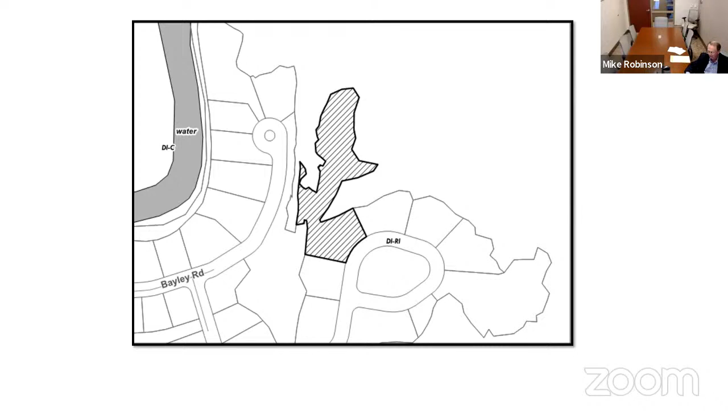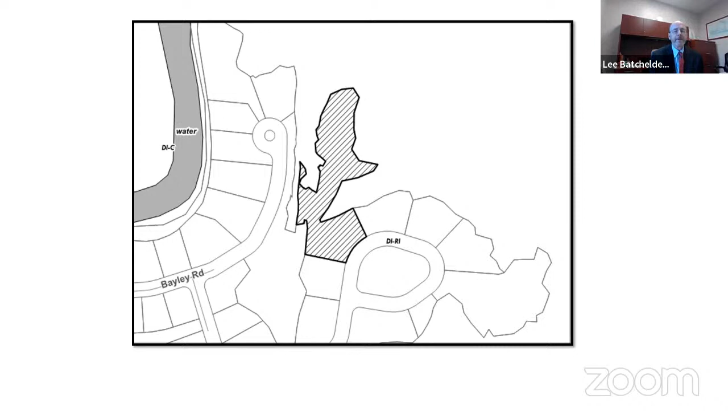Mr. Batchelder: This is a residential lot on Daniel Island, and as you can see, it has a very, very unusual shape. This request came before the board maybe a couple months ago, and is now back in front of you with some additional information. So here's the zoning map showing the location of the property, the fact that it's zoned Daniel Island Residential, which is a specific zoning district to Daniel Island.

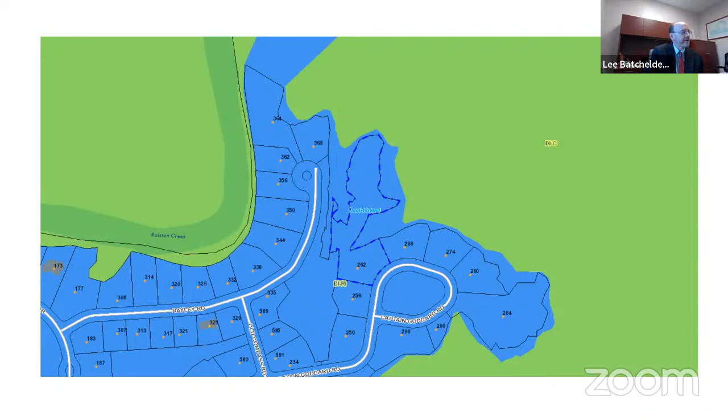Here's an aerial view looking from the north at the lot. It's on the Wando River side of Daniel Island, in a new section.

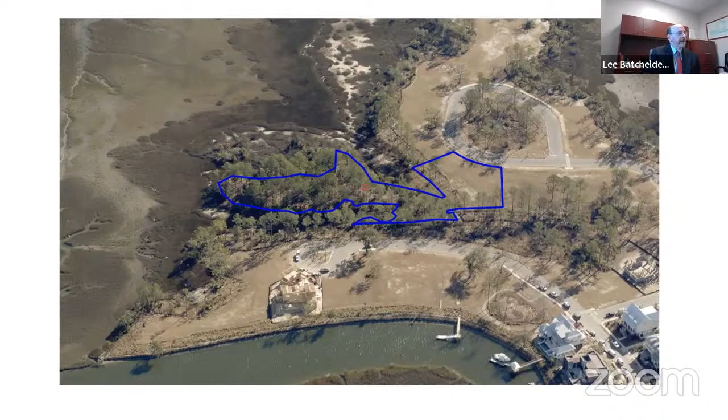The application was filed back in January and was deferred by the board in mid-February, with a request that the applicant gain approval of their proposed bridge connection, which was requiring the variance, from the Daniel Island Architectural Review Board. They have since done that, so they've requested this be placed back in front of you for consideration.

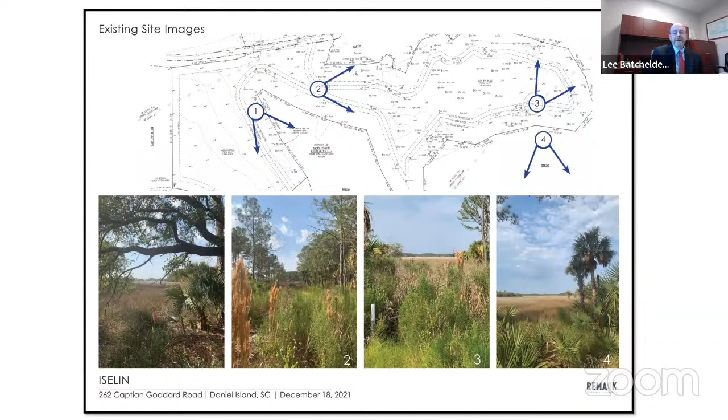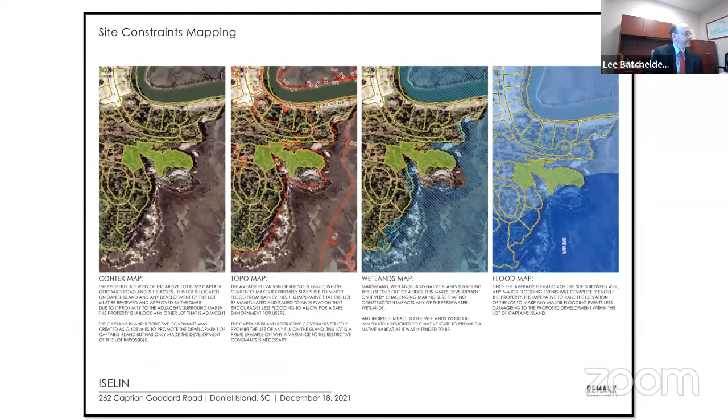Here's a survey of the lot, and there's an image later that will clearly show all the restrictions that apply to this property. I'll skip to that. These are other slides showing views of the property from different locations, and more views of the island, or of this lot.

On Daniel Island, we have a zoning requirement unique to that part of the city: a visual buffer zone. When the city annexed and zoned Daniel Island in the early 90s, we adopted a visual buffer zone requirement for lots that abut the marsh. The idea was that the tree canopies and vegetation around the perimeter of the island should be preserved as it's developed, so we don't end up with manicured lawns extending right down to the critical line, but retain that natural vegetation and natural edge to the island.

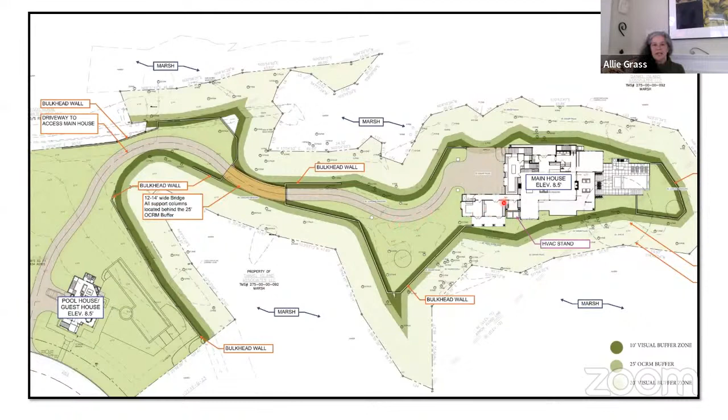I think in the application, as read into the minutes, it's to allow a bridge to encroach 5 feet. It's very specific about what they're asking. Right, and I also saw in the letter from the Daniel Island board that their approval is only for the bridge and not for the specific lot. So I'm just wondering if the board should maybe note that we're approving just the bridge, since the application was geared more toward the site not being developable due to the restrictive covenants.

I mean, maybe we don't need to, but I'm just trying to clarify. I feel comfortable myself, but if you wish to approach the board members to see if they want to amend the motion and the second, that's fine. The application states only to allow the bridge to encroach. That's all it says. Right.

Well, can Mr. Batchelder address it, please? Well, yeah, we're just dealing with the bridge. The house is a separate application process. They'll have to go back to the Daniel Island ARB and satisfy them before they can even submit their plans to the city for approval.

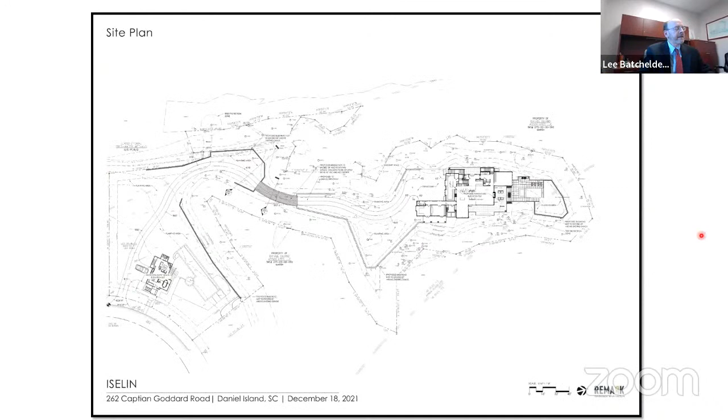And in fact, when I look at this plan, I see there's what looks like a grand tree right here, labeled as a grand tree, and that's something that will have to be studied. It looks like they're staying out of the tree protection zone with the construction.

Sometimes limbs on these grand oaks can be a little bit odd when they're growing next to the marsh. They can grow off in different directions. So we'll need to take a close look and make sure that tree is not going to be impacted by the proposed improvements and fill with this project. That might require some sort of approval through the other Board of Zoning Appeals that deals with tree protection.

But the house improvements, building improvements on this lot, would have to go back to the Daniel Island ARB. We don't even review plans for approval on Daniel Island without a stamp of approval from the Daniel Island ARB. So we know before we ever start reviewing a set of plans that the ARB has already reviewed and approved it for their covenants. Okay, thank you so much.

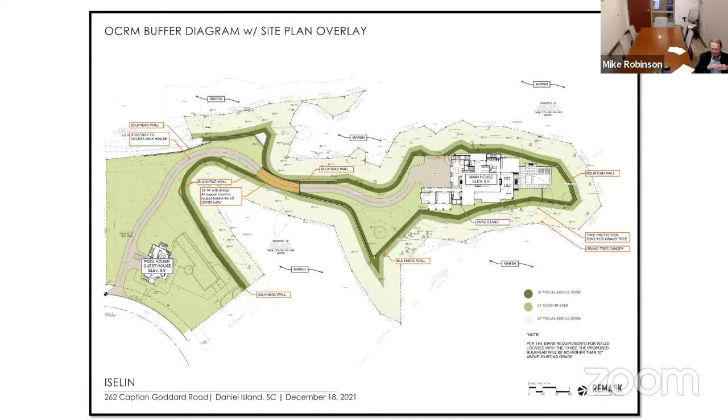Was that an aye? Yes, aye. Thank you, Mr. Jadon, aye. Ms. Grass, I would rather have not seconded that motion, please. Sorry, I hate to be going back and forth, but did you do the initial second? I didn't. You said that I seconded it, and I'd like to not second it, please. Okay, I'm very sorry, I didn't pick up on that.

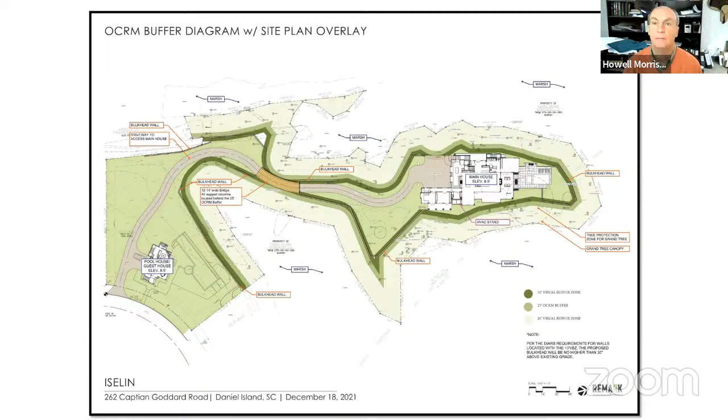It's one of the benefits of doing Zoom. It's difficult to know exactly who's talking. Thank you very much.

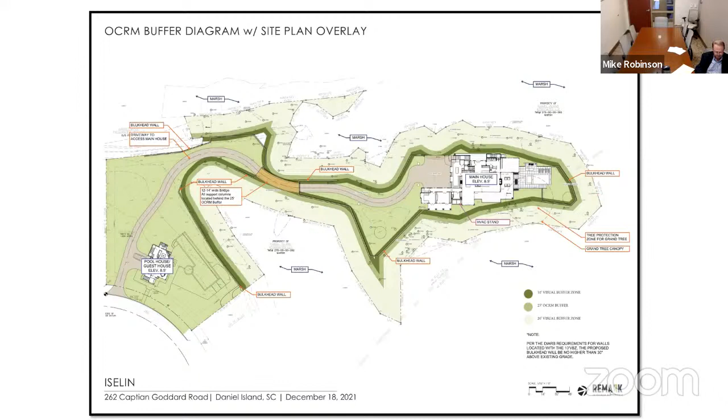Item number B1, 1 Simons Street, North Central. Request for a use variance from section 54-203 to allow a storage and repair facility for pedicabs and bikes in a DR2F diverse residential zone district.

Mr. Batchelder: This is an unusual property in the North Central neighborhood. It's a residentially zoned property, but it is not a residential building. It's probably never been used that way in its history, but you can see its location here on Simons Street, right next to the right-of-way for I-26 and the railroad.

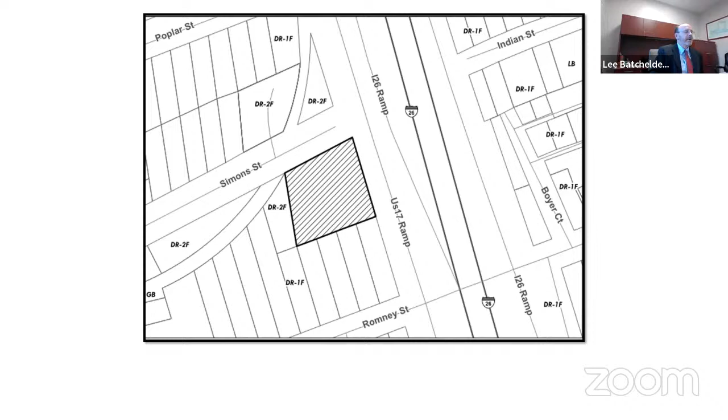Here's a zoning map showing the property has DR2F residential zoning, as does all the surrounding properties. Along King Street you get into commercially zoned properties, but this property sits well back from King Street. My guess is that it was originally constructed as a warehouse or some sort of industrial facility in connection with the railroad, which ran right by the front of it.

You can see on this zoning map this curved strip of land that bisects two blocks - that's a former railroad right-of-way. One of the railroad lines that came through Charleston came down the center of the peninsula, then curved and went down through Wagner Terrace and through the Citadel, across the Ashley River and through the neighborhoods in West Ashley. That railroad was abandoned long ago, but this building, which probably goes back to that era, still exists, and it's been used for a variety of light industrial, commercial activities as long as I've known about it.

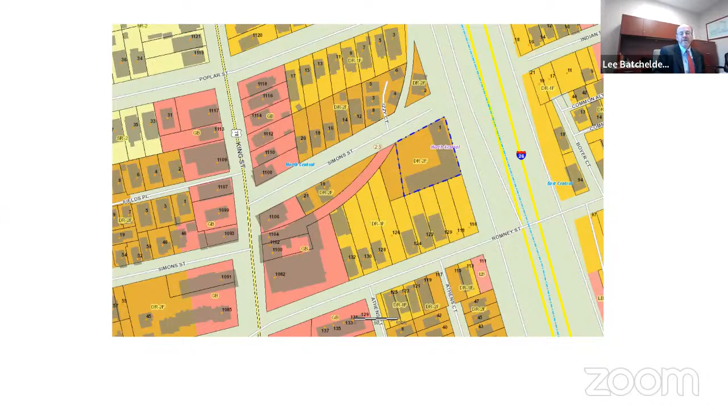Then the application was filed, and here are the applicant's explanations, part of the record that was available before the meeting.

So the use is clearly not a residential use, but that's not a residential building, and we felt it was important for this application to go through the board. These types of uses have bikes coming and going for storage, and they operate later into the night and that sort of thing. So we want to make sure that the applicant contacted the neighborhood association and the neighbors up there and made them aware of it.

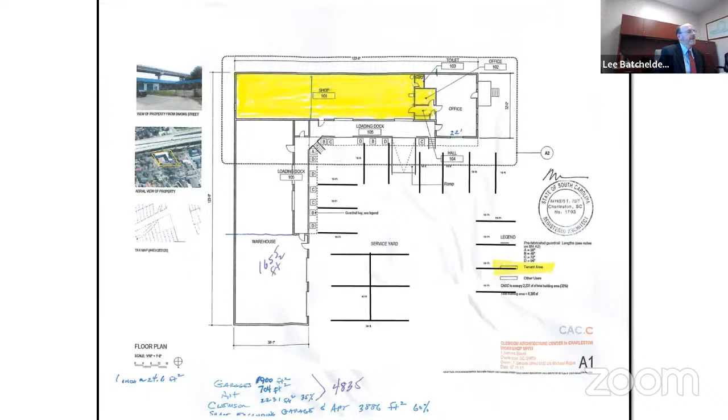But the building has had a variety of uses. For a while it was the shop for the Clemson Architecture Center, which has that label down in the corner - a wood shop and other kinds of facilities to build things was located in this building. And there have been other users up here too, so it's had a variety of history and uses.

So anyway, more information - we have information from the neighborhood association. The applicant really did a great job of communicating with the neighbors and the neighborhood association and gaining support, getting letters for this use from those people. Here's a letter from the president of the North Central Neighborhood Association indicating that they support this, also the co-chairman of the Friends of the Low Line.

Tom Bradford, and other folks who have property up in that area or live up in that area - these were all part of the record that was available online. The applicant submitted these with their application, so anyway, there's a lot of support, and we think the use is appropriate for that building given its history and the type of building it is.

I'm just going to quickly go through these. You can see there's Simons Street, King Street, Poplar Street, and Fields Place, and Romney Street. More photographs showing the building.

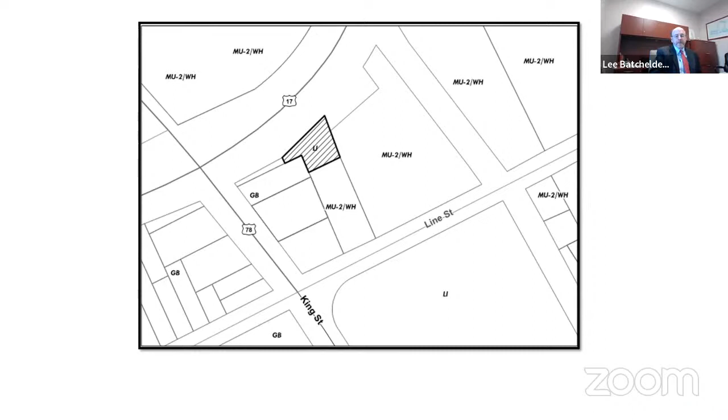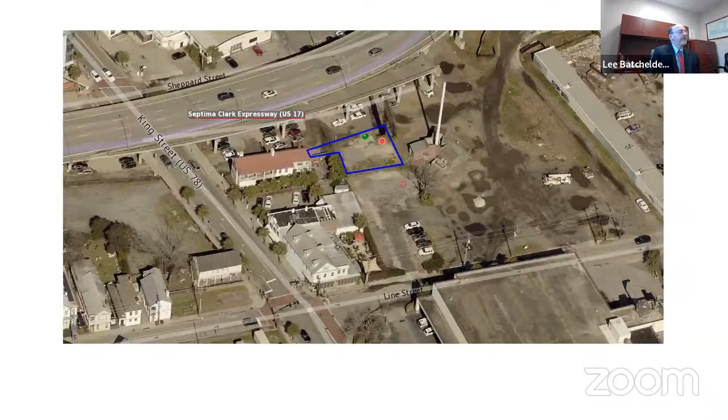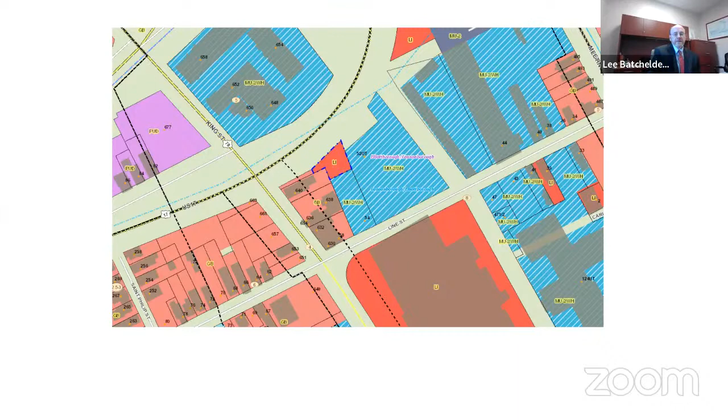The applicant filed their paperwork. One of the things I added to this presentation is to make clear why this matter is coming before the board. We must have 20 or 30, maybe more, communications towers in the city of Charleston built since the cell communications explosion in the 90s. I think the board has probably seen 2 of those towers, and I don't think there were any more that came before the board.

The existing tower at this location is one of those 2 towers that the board saw years ago, because of the National Register listed property next door. The other one is on James Island, and that involved the visibility of that particular tower from a National Register district.

The language in the ordinance we adopted back in the 90s listed all the staff approval criteria, the conditions that would have to be met in order for us to staff approve towers. In virtually all the cases where we've got towers today, those towers met those criteria, and the staff was able to approve them. That's how we ended up with what we have today.

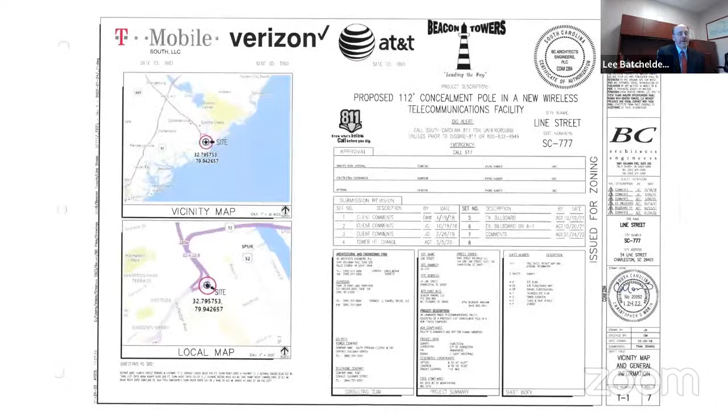They include in their exhibits an email stating that, and I'll run through these other exhibits as well. These are the plans showing the proposed tower. Typical of any submittal, it includes a lot of detailed drawings. You see the tower location right here. All of the equipment for the carriers on the tower will be located here on the ground.

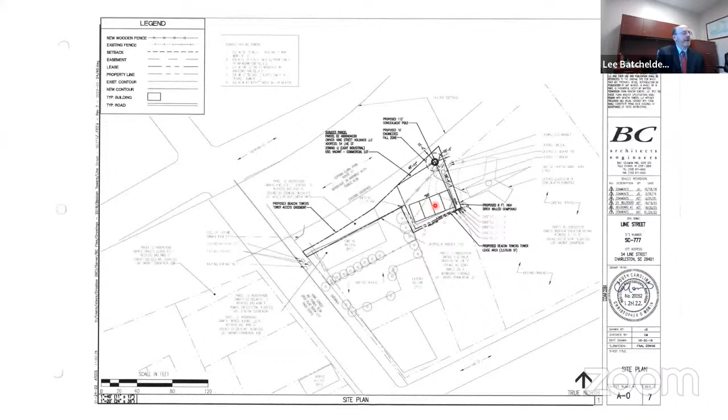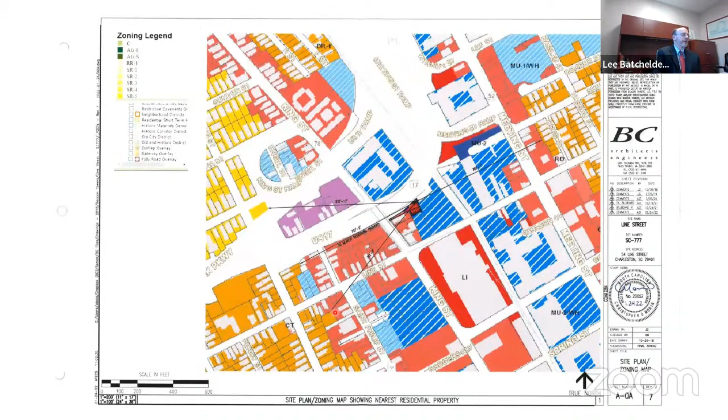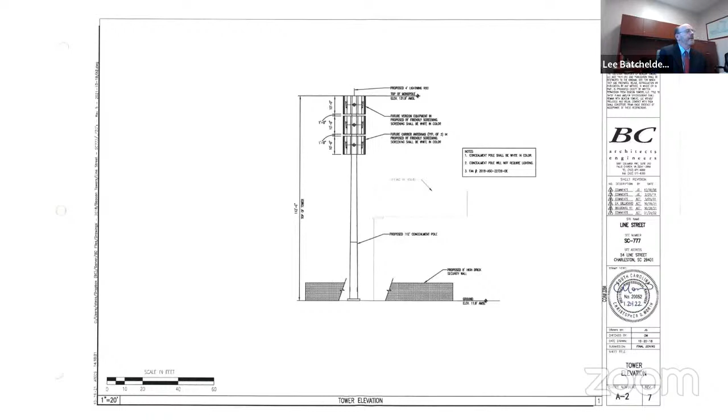This is designed for 3 carriers, since there are 3 locations right here. That's typical of the towers. It will be enclosed by this brick wall.

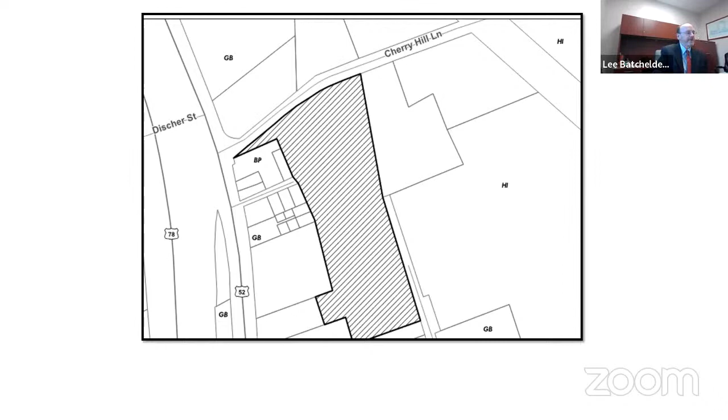It's a property that is mostly zoned general business, but there is a portion on the north end that's zoned heavy industrial. Our zoning ordinance includes a provision that says for a heavy industrial property to have residential units on it, the Board of Zoning Appeals has to approve those units. So residential is allowed in heavy industrial zoning districts. I think that's probably a carryover from years ago when we had more heavy industrially zoned property in the lower part of the peninsula. We don't have so much today, but that provision remains.

So for them to take advantage of any residential density they might obtain in that heavy industrially zoned area, they have to come before the board and seek your approval.

So this is the zoning map, and you can see the property. Probably 3/4 of the property, or more, is zoned general business. And then there's this one little area on the north end zoned heavy industrial.

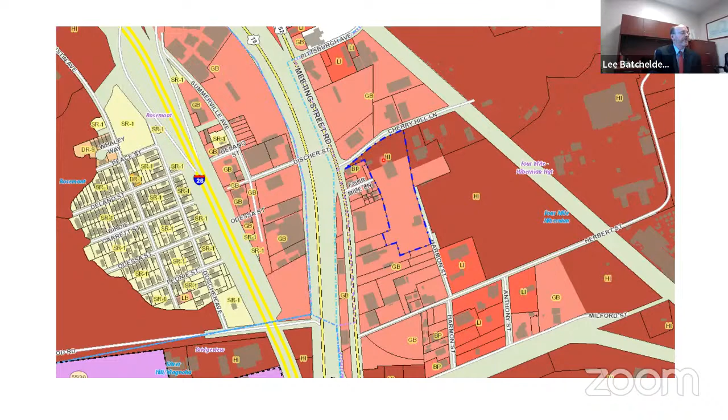And the surrounding properties, most of these uses are commercial and light industrial. Really, probably the closest heavy industrial use would be over here, where you see the North Charleston sewage treatment plant, and then the concrete products manufacturing area east of the subject property, several hundred feet away.

But most of the immediate area is occupied by commercial uses and light industrial types of uses.

There's a small little pocket of a neighborhood right here called 4 Mile, and there are some homes in there. I assume some of those are probably still used as residential properties. Those have been there for many years.

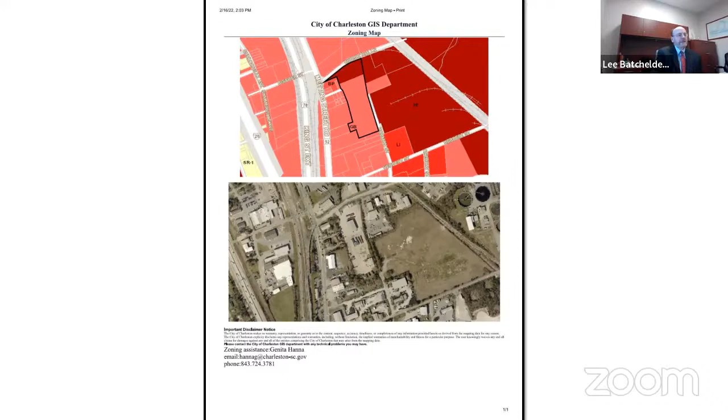And then they've submitted other exhibits showing their proposal. Again, this is a zoning map and aerial view, an illustration of their zoning on that property and the surrounding uses as well.

So the city does own this large property over here to the east, and I think intends to relocate its storage yard, vehicle maintenance area, and parking lot for all the heavy equipment it operates over to that area someday.

This is the language in the ordinance that applies to this situation. Dwellings in the heavy industrial district shall be permitted as an exception where the board, after review, finds that there shall not be created any unsafe living conditions given the existing uses in the area. So again, we really don't think there are truly heavy industrial uses in the immediate area of the property that would create any unsafe living conditions.

We're concerned about the future of the property to the east that the city owns, and the potential impacts that the city facility over there on that industrially zoned property might have on these future residential units.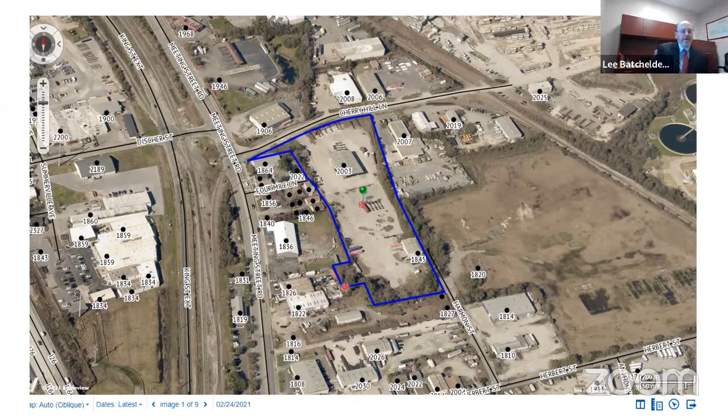Well, I believe the owners of this property also own one of these pieces coming out to King Street. Or Meeting Street, rather, Meeting Street. And I believe that's the case. We can ask one of those applicants. I see Brian Riley on the phone or on the call today. We can ask him to join the meeting and he could answer that question if you'd like.

I would like to, and before I do, one other question for you: would the approval of the various elements of the buffer go before the site design zoning board, or is that subject to just staff? I'm just curious what elements would be required in the buffer.

Well, we talked about canopy trees going in that buffer, and the plans, I don't believe would have to go through the Board of Zoning Appeals site design unless there are trees issues that I'm not aware of or other site issues that may require that. Instead, it will have to go through the technical review committee of the city, and we will scrutinize a landscape plan for that when that happens.

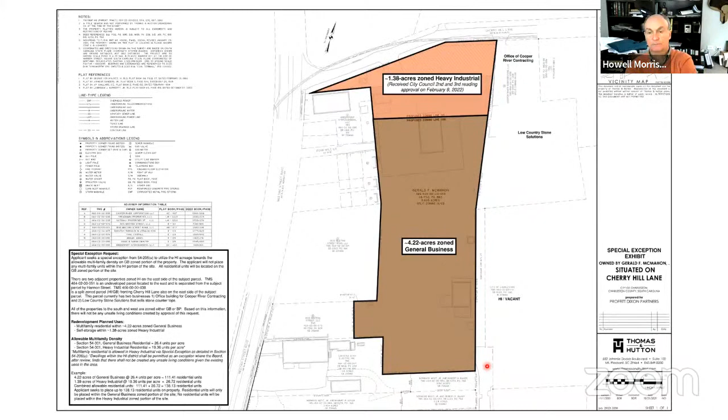Move approval. Is there a second? Second. Thank you. All in favor signify by saying aye. Mr. Morrison, aye. Mr. Jadon, aye. Ms. Grass, aye. Ms. Richards, aye. Mr. Bennett, aye. Mr. Robinson votes aye. The motion is unanimously approved.

Thank you very much, with the city's recommended condition with the buffer. With the recommended conditions, absolutely, of a 25-foot landscape buffer on the east side.

Thank you. Next item is item number 4. Ms. Richards will recuse.

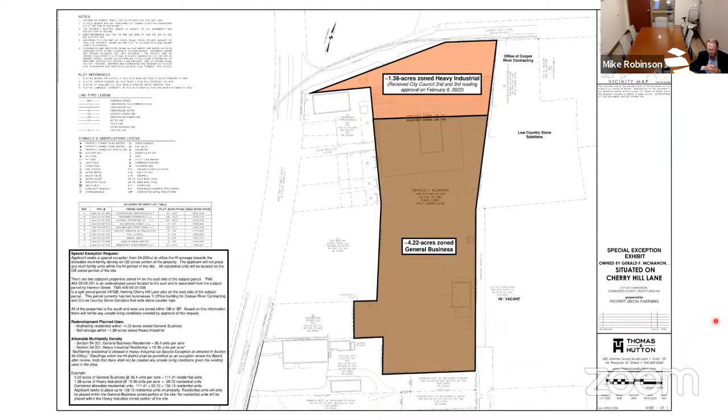90 Cannon Street, Cannonborough, Elliottborough. Request a special exception under section 54-511 to allow restaurant use on the first floor with 700 square feet of inside patron use area, 260 square feet of patio outside patron use area, without providing required off-street parking spaces. 9 spaces required, zone limited business. Mr. Batchelder.

90 Cannon Street is a commercial property in the Cannonborough, Elliottborough neighborhood. It contains a 2-story building. The property is located just east of Rutledge Avenue on the north side of Cannon Street.

This aerial view shows that 2-story building. It has a storefront on the front of it, so clearly it was used in the past as mixed use or commercial use, and I think probably had a residence upstairs. There is no off-street parking associated with this property.

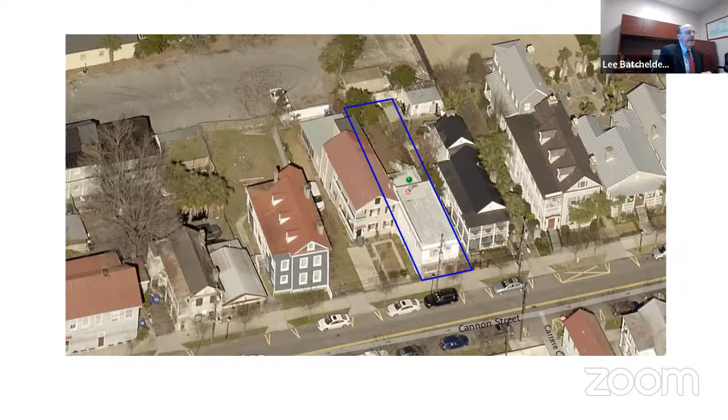Application materials include the explanation, which I will skip through and get right to the building. Here are images of the existing building. You can see that storefront - it's been there for many years.

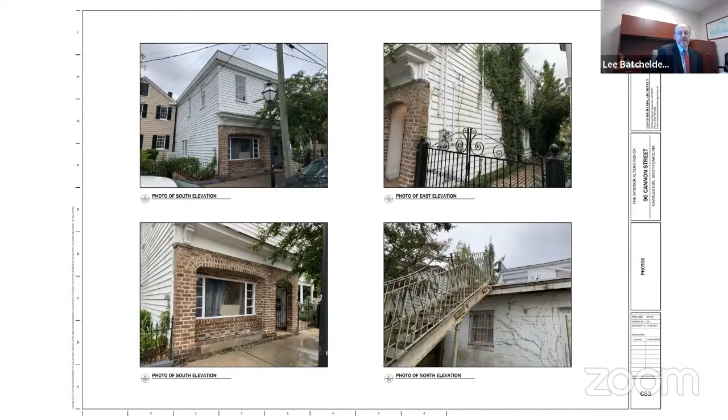Here is a survey of the property. This is a joint passage, so this doesn't go with this property over here. So this is the existing footprint. What you have is a two-story building up here in this location, and then a one-story section on the back of the building, and then a large yard in the back.

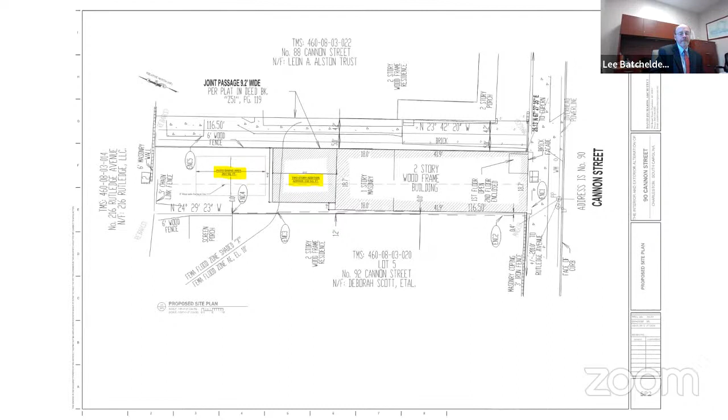What they would like to do is make this one-story section 2 stories, add a two-story addition to the back of the existing building, and then create an outdoor patio dining area in that backyard. The property is zoned limited business, like most all of the properties on Cannon Street and Spring Street. The commercial use is permitted, the residential use upstairs is permitted. The only issue that we're dealing with is really parking.

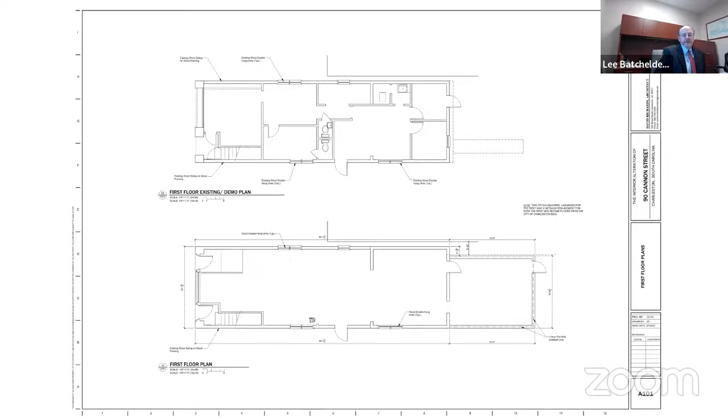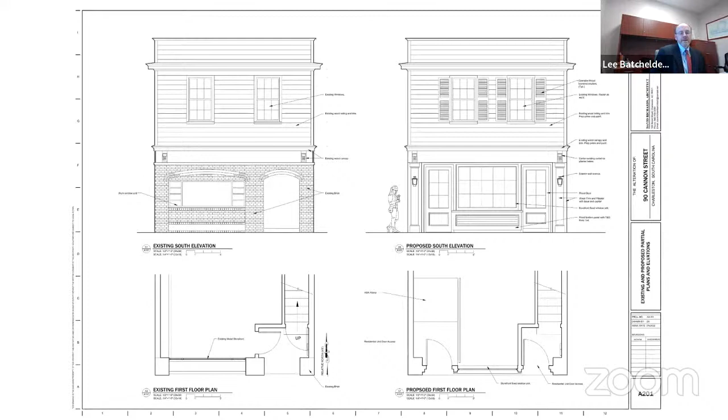So all of these changes end up requiring 9 parking spaces for the proposed uses, which they can't provide on site because of their inability to provide access to that rear yard. As they indicated in their letter, they have looked and cannot find any off-street parking available for lease in the area, and I think that's pretty much the case now.

There's been so much that's happened up in this area. You have Cannon Green, a commercial property right down the street from this that extends from Spring Street all the way through to Cannon Street and has event spaces within it. They have a parking lot in this block, but it's for their use and not for other people. Other opportunities are pretty much gone now because there's been so much redevelopment and development that has occurred up in this area of the neighborhood. So they simply don't have any options.

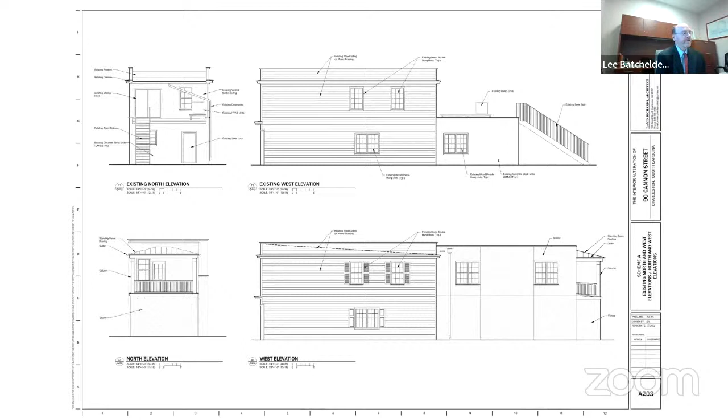They have approached the neighborhood association and obtained the support of the neighborhood association. I think I forgot to put the letter in this presentation from Marion Hawkins. No, here it is. Okay, good.

So here's the letter from Marion Hawkins, the president of the Cannonborough neighborhood, indicating that they discussed this at their February meeting and voted unanimously to support the applicant's request to allow a restaurant without required parking. So our recommendation is for approval.

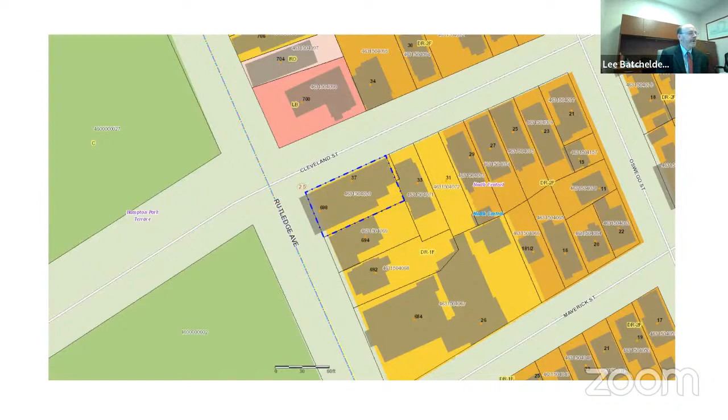So any new commercial use in this building is going to require a use variance from the Board of Zoning Appeals. And that is the nature of the request before you, along with parking. Of course, you can see from this image that the building pretty much occupies the entire property. If I go back to this, there's no room for any off-street parking. There's a gate right here, and I guess a walkway, but that's not a driveway for vehicles. That's not wide enough. And there's no space coming off of Cleveland Street.

So there's simply no room for off-street parking on this property. So the request is to allow this building to be renovated and reused with a ground floor retail use and second floor office use. Both those types of uses require your approval as use variances. And then the parking requirements are such that they need a special exception to not provide the 15 spaces that are required for those uses.

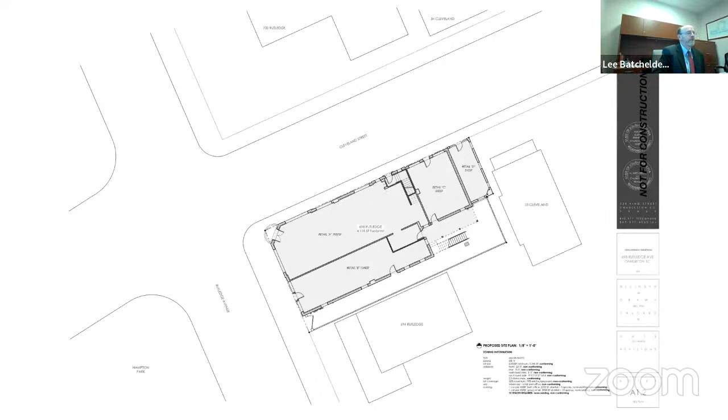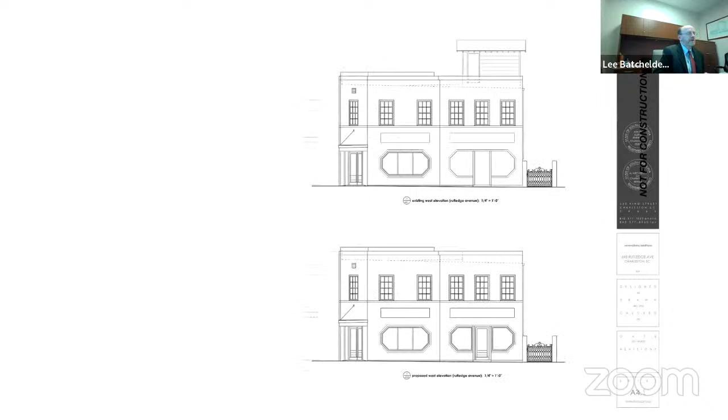Here's the applicant's information, more information from the applicant. And I'll just go through these quickly. These are floor plans showing what they would propose to do. Retail on the ground floor. Existing second floor, proposed second floor. Roof. It's an interesting looking building. It's unique, I think, is a good way to put it.

Photographs of the existing building. And it looks like, you see windows that don't exist anymore. And it really needs some attention. And then on the back of the building, you can see a lot of deterioration that's occurred over the years. So great that somebody's investing in this.

So our recommendation is for approval. And I think there was an owner of the property next door on Cleveland Street who was concerned about this and expressed those concerns to us. But I really think with the proposed uses they couldn't come up with a better mix of uses to lessen the impact to the neighbors. Because if you put residential units up on that second floor, you'd have the occupants of those units parking on the street all evening and all night and all weekend or most of the weekend.

So they might not be there in the daytime on weekdays, but there would be cars there otherwise. Office uses tend to generate parking demand on weekdays, not in the evenings or weekends. And retail uses probably would have a lot of walk-up traffic, but even that would be minimal and certainly not be there in the evenings and on the weekends too much. So I think the type of uses they're proposing are actually beneficial.

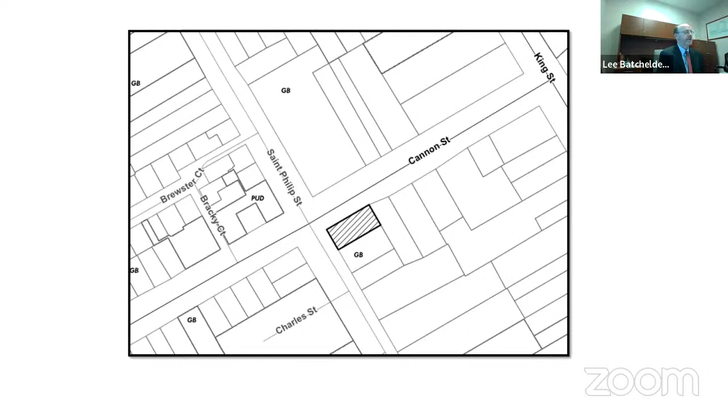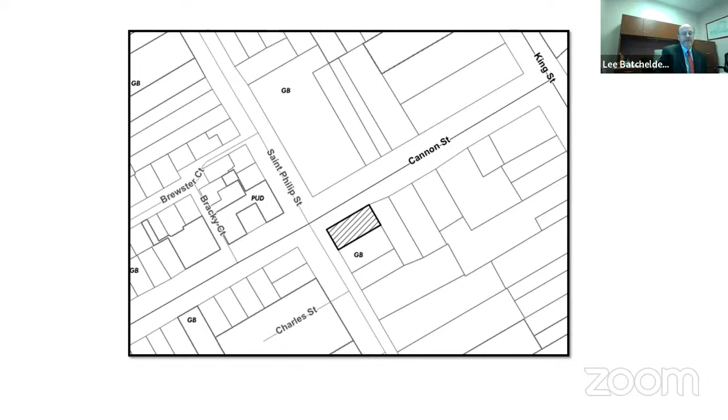So here's another property in Cannonborough Elliotborough. This one has a different history to it. This is a corner property, corner of St. Philip and Cannon Street, and it's commercially zoned, actually zoned general business in this location. The building that's been sitting on this property for many years is a dilapidated building that has been pretty much in the same state as long as I can remember, going back many years.

So now we have an applicant proposing to demolish this building. It's not historic. They want to demolish the building and build back something that would be more typical of what you would find on a commercially zoned corner property in this neighborhood.

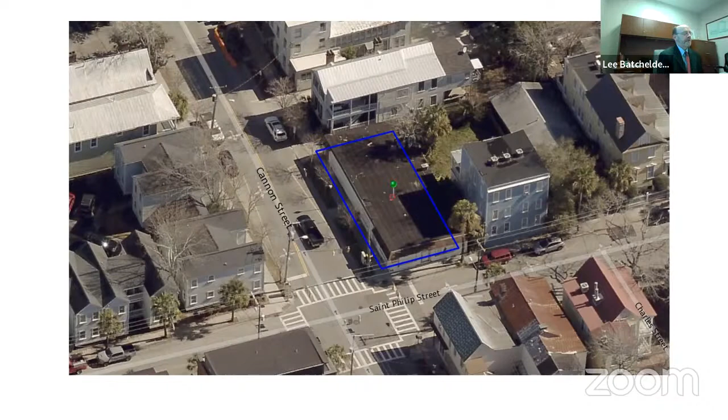And again, we have a request that involves parking because the building as it currently sits on the property has no room for parking, and the proposal is to not provide parking either, because it's just not an appropriate type of use along Cannon Street on this property. It's not a very large property, as you can see.

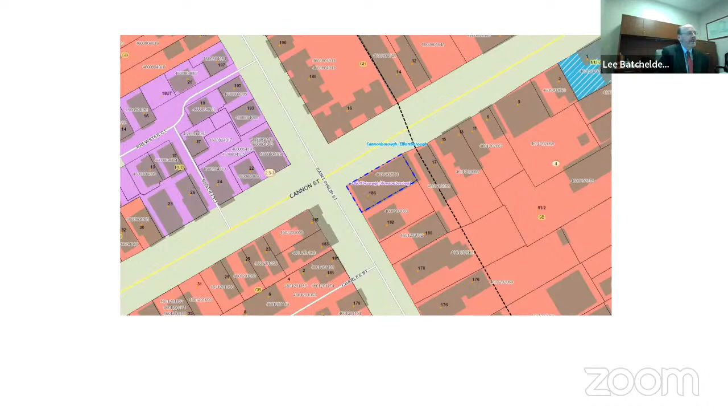If you were to put off-street parking on this property, it would probably be a little bit unsafe for access, given the traffic on Cannon and St. Philip. Also, you wouldn't end up getting much parking on site, and you'd have to remove parking probably on the street, or impact on-street parking, in order to put those driveways in place. So it doesn't really make sense, doesn't lend itself to having any off-street parking, given those constraints.

Here's the application, explanation, and survey of the property. So we'll get right to it. Here are plans that show the proposed building on the site.

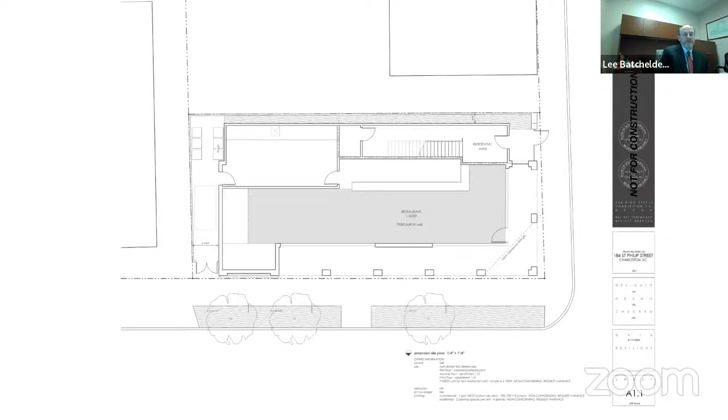They would have a ground floor restaurant space and kitchen, and then access to residential units upstairs. They would also provide some space back here for the trash and things like that, which is appropriate and important to provide. On the second floor, there would be the living space associated with two residential units. The third floor would be the bedrooms associated with those units. And on the roof, they would have a small area that would be accessible.

These are just conceptual plans showing what this building might look like. It will, of course, have to go through the Board of Architectural Review and be approved by that board. But these are just illustrations of that 3-story building.

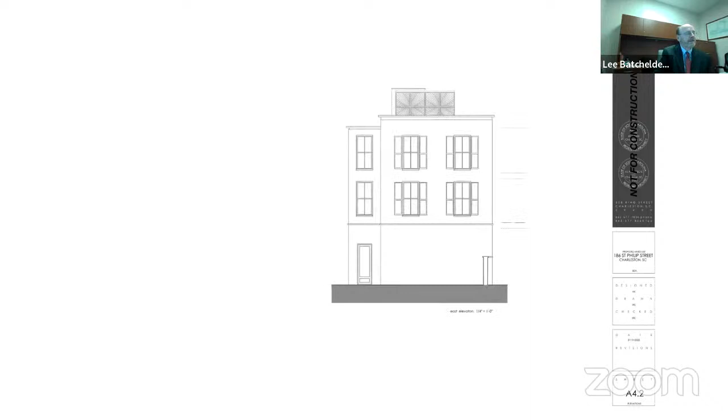And the back view, east elevation. This would be the north elevation, Cannon Street elevation. Another view here of the south elevation. And an image of what that might look like.

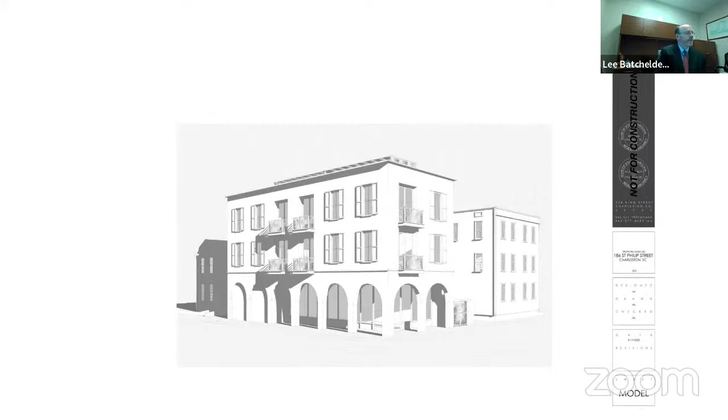A letter from Marion Hawkins, president of the Cannonborough/Elliotborough Neighborhood Association, indicates they reviewed the plans at their March meeting, stating they like it because it will activate the long neglected street corner and replace a derelict building. The small lot presents significant challenges to development because this development is at an entrance corridor and represents an important corner.

The neighborhood association voted to support both variances, the density variance as well as the parking. One condition is that the owner work with the neighborhood on noise mitigation measures at the rooftop. My understanding is that the applicant will work with the neighborhood association on coming up with a way of installing whatever technology is needed to help monitor and mitigate the impact of noise on that roof. That's something they've agreed to do with the neighborhood association. So with that condition, they strongly encourage the board to approve the request.

I feel like this is a really exciting opportunity to finally have a redevelopment of this corner. This property has been sitting here, and I don't know that we've ever seen anybody actually get to the point of making an application where they were able to get it under contract and move forward with something. It's really exciting to see this corner finally have a proposal being put forward, and we think it's an appropriate use, very typical of the corner store, corner commercial uses in that neighborhood. So we recommend approval.

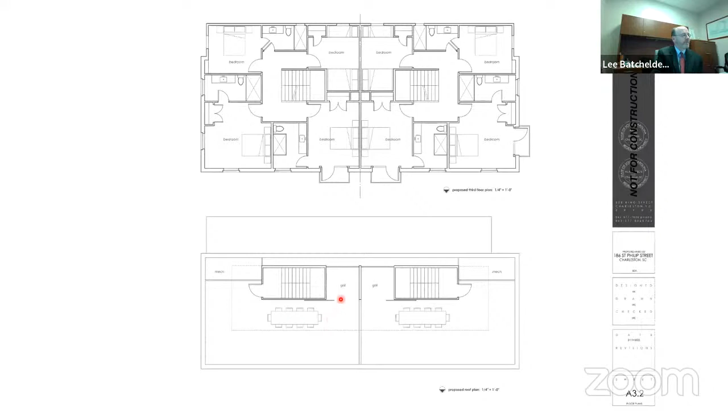Mr. Batchelder, in the application there is no mention of rooftop use. Well, so you see the plans here that include these stairs that provide access between the living level and the bedroom level. They extend all the way up onto the roof to provide access, where each residential unit would have access to its own portion of the roof. The plans clearly show that as part of the residential units. And those residential units, because of the location within that neighborhood, assuming they're approved, would be able to be converted into short-term rental units.

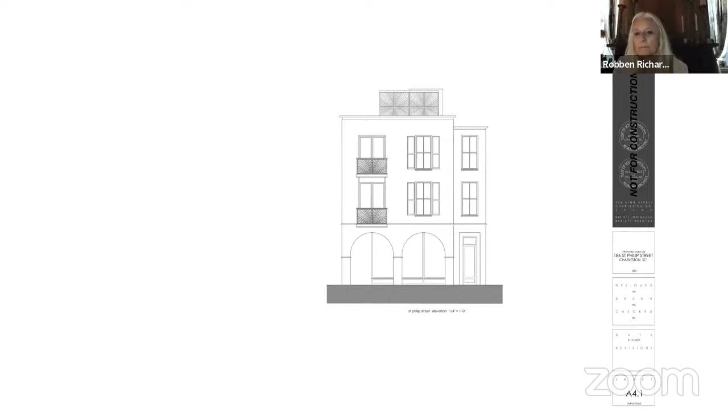I think the neighborhood, I don't want to speak for them, but I believe they were just excited to see something come forward from somebody who's done quality work in that neighborhood, and wanted to see this project move forward, and agreed that they would be supportive with that condition about working with the neighborhood on the noise mitigation on the roof. I contacted both the neighborhood president to understand what they were talking about, and I got the letter. The applicant and the neighborhood are both on the same page about how to deal with that, I believe. And I know the applicant is on the call in case you have any questions for him or his architect, Ashley Jennings.

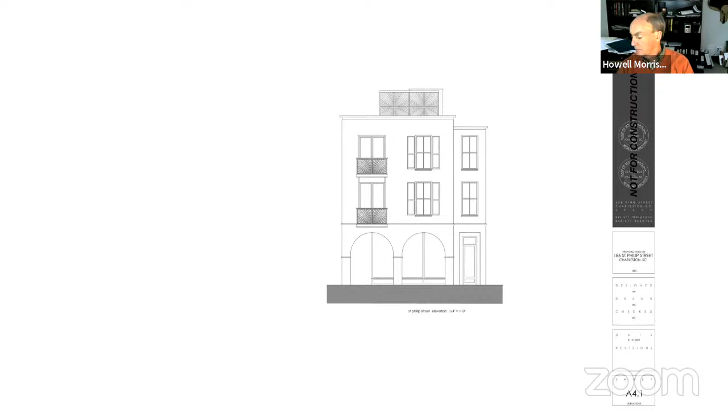Any questions from the board? Any motions? I move for approval. Move for approval by Mr. Jaudon. Is there a second? Second by Mr. Morrison. All in favor, signify by saying... does that include that condition about the applicant working with the neighborhood association on noise mitigation measures? Yes. Thank you.

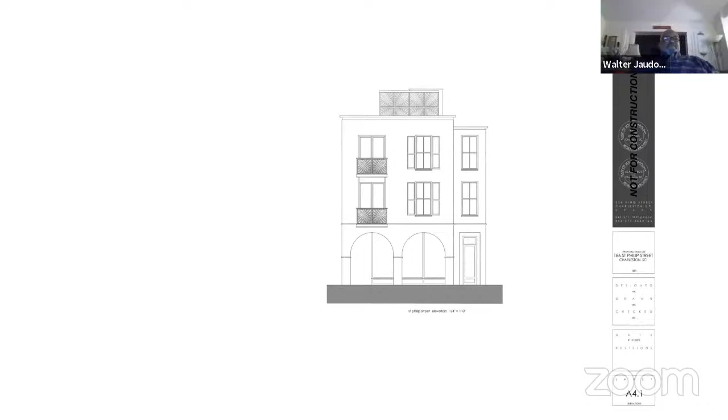All in favor, signify by saying aye. Mr. Morrison, aye. Mr. Jaudon, aye. Ms. Grass, aye. Ms. Richards, aye. Mr. Bennett, aye. Mr. Robinson votes aye. The motion is unanimously approved.

Item number 7, 330 West Confederate Circle, South Windermere. Request for a special exception under section 54-110 to allow a one-story addition, kitchen expansion, and dining room that extends the non-conforming 7-foot south side setback, 9 feet required, zone SR1.

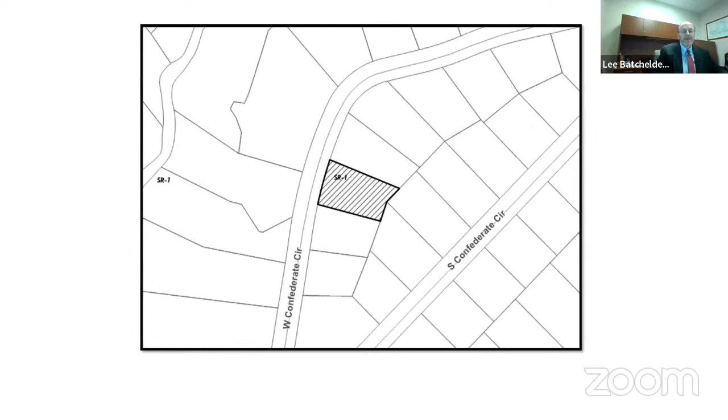330 West Confederate Circle is an existing home in South Windermere. It's a one-story house, and you'll see that image in just a minute. This is the location of the property, an aerial view, and a zoning map.

That existing house already has a 7-foot setback to that corner, and what they're proposing is to build this addition on the back of the property. Again, the back corner of the proposed addition would have a 7-foot setback consistent with the existing house. So the request is for a special exception to allow a one-story addition to extend that non-conforming 7-foot setback on the south side.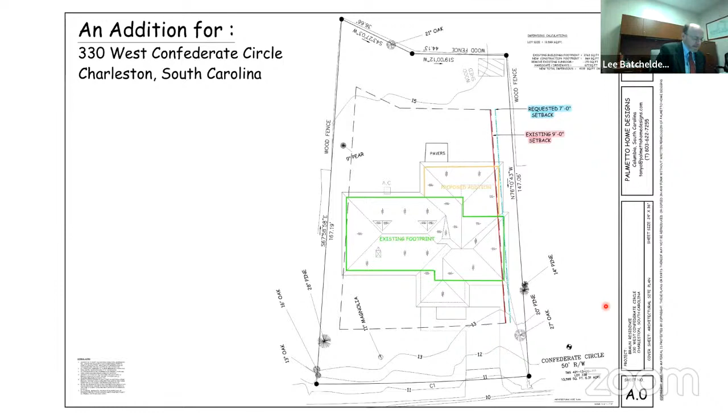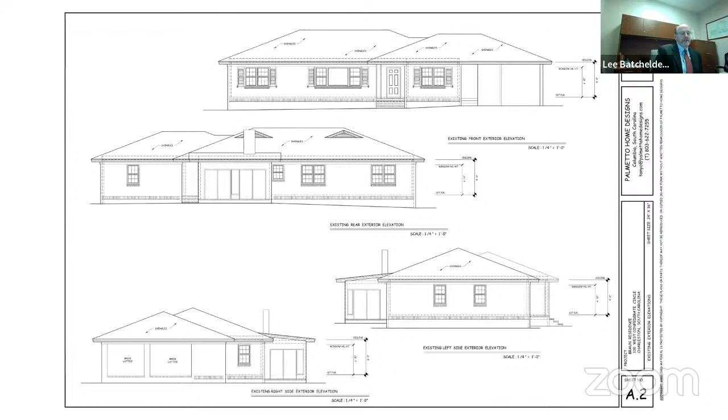Just an enlargement of that. This is the existing front elevation on top and the side elevation on the right. This is a carport right now, and the proposed elevation shows that the conditioned living space is being enlarged to occupy what was the carport area, with the addition located back here.

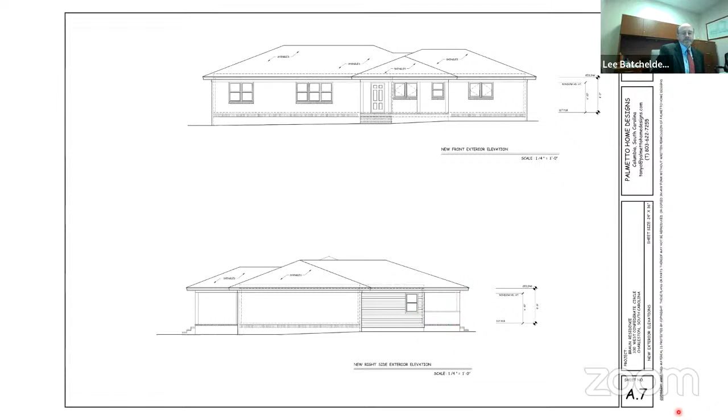It's basically a dining room addition and covered porch in the back. They've spoken to neighbors and obtained letters of support. This is a special exception, so it's an issue of light and air impacts, and the house really isn't that large in its existing configuration.

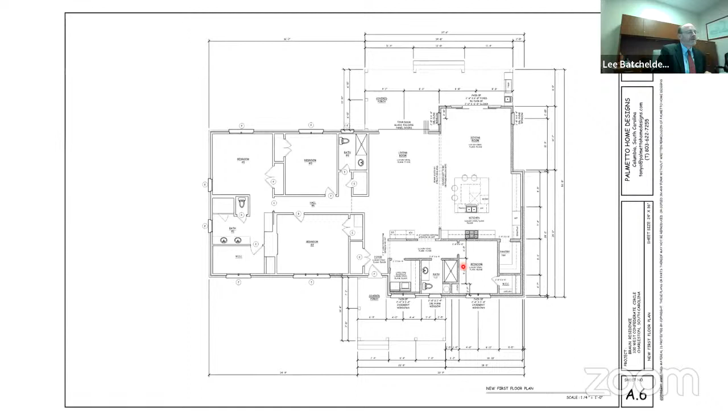Again, this is the new floor plan. Their additions are proposed to enlarge the living space while still keeping the parking. But because it's a one-story house, there are limited opportunities for how you do that. This seems like a very appropriate way to expand the house a little bit and make it fit in.

So the changes will not dramatically change the appearance of the house, and I really don't think there'll be any impact on the neighboring property. Nobody has expressed any opposition or concerns to this request, and we have letters of support from some immediate neighbors. So our recommendation is for approval. The city recommends approval and there's no opposition. Are there any questions from the board?

Motion for approval made by Mr. Morrison, seconded by Mr. Judon. All in favor signify by saying aye. Mr. Morrison, aye. Mr. Judon, aye. Mr. Rass, aye. Ms. Richards, aye. Mr. Bennett, aye. Mr. Robinson votes aye. The motion is unanimously approved.